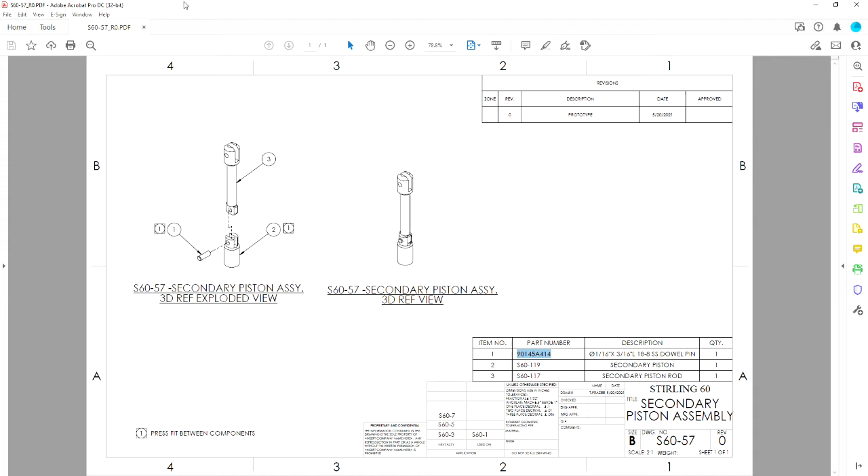We're going to go to our browser, and you're going to go to www.mcmaster.com. If you're working virtually, you want to do it through the browser on the virtual computer so you can download it straight there. Otherwise you have to download it to your local computer and use the file transfer. Okay, so if we go back to our drawing, I'm going to highlight the part number from the PDF and use Control-C, go back to our browser, and Control-V to paste that part number in McMaster-Carr's search tool.

Now you could search through it as fasteners, dowel pins, and it's a great resource for engineering because they give you a lot of information here. And also if they carry it, you're pretty much assured it's a fairly common item. It's not going to be hard to source elsewhere. So this brings me right to the catalog page for those 18-8 stainless steel pins, and it highlights the product that we're going to use.

And if there's CAD data available, computer-aided design data, you're going to select product detail, and it might make you create an account. It doesn't cost anything to have an account, so go ahead and do that if you don't already. Well, let's try it again. I'm going to put in my product and go to product detail. On this page, it's going to give you all the specifications, typically a drawing, an image, and what standards it meets.

And it looks like now they actually have an add-in for SolidWorks 2017 or newer. I wasn't aware of that. That's not installed in the lab, so maybe next semester I'll get that installed. But you can basically download a model in any of the following formats. The 2D is going to be a drawing itself, and the 3D models are going to be actual models, so that's what you want.

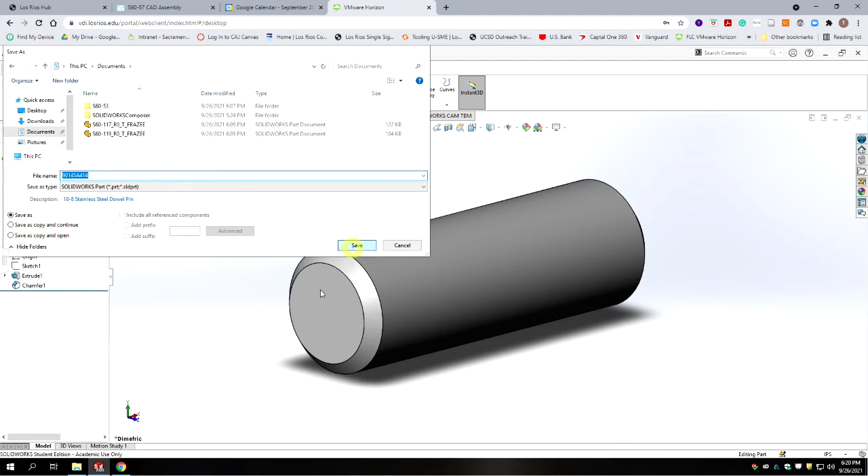Okay, we're going to hit save. And it's going to ask you, this is an older version of the file. Do you want to convert to the current version? Yes. So we're converting it from, I think, SolidWorks 2014 to the current version. Okay, hit yes. All right. So we're going to close the part file, and we can go back to our File Explorer, and we should see our 3 files together.

Now in large assemblies, I will often make a folder that's just for hardware, and then those part numbers go in there so I know what's purchased versus what is modeled. And if I use this component in multiple assemblies, then I just have to download it the one time and just reuse it. But for this class, it's probably better you keep them all together because you're going to have to upload all 3 of these files, including the assembly file, which would be a 4th file, in Canvas, and I need the links to be independent of any other file structure you have. So we're going to leave it all at root here.

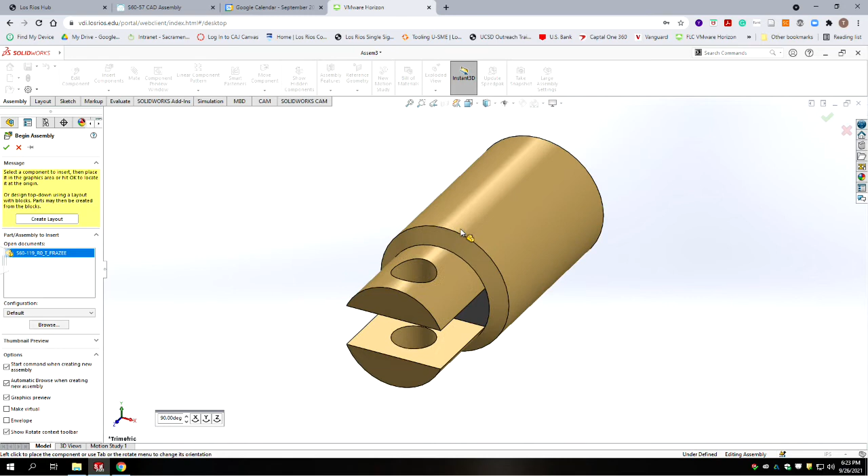Now we're going to go to SolidWorks. And we're going to go up here, we're going to say File, New, and we're going to create a new assembly. And it's going to ask us, what's the first part you want to bring in this assembly? It's the highest part number, which is the 119. So we'll select that. And remember, we want to temporarily turn on our origins.

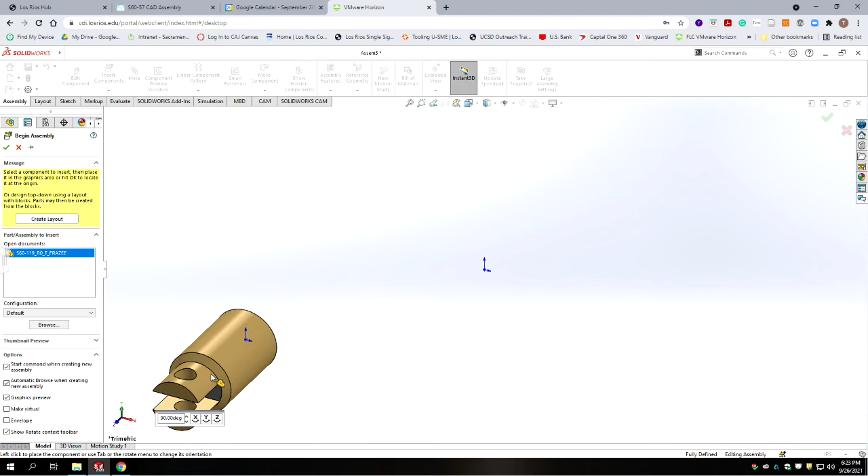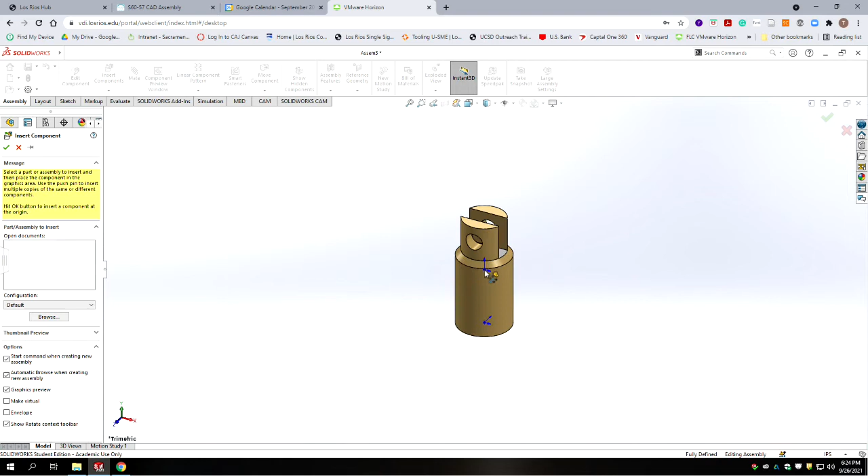And this actually is not in an orientation like I want for the assembly. So if you see down here, there's an angle by axis that you can spin. So I want to rotate this around the x-axis 90 degrees and then do it again and do it again. Okay, and then that looks more in the orientation it's going to be used on the machine. And then I'm going to hover over origin and select origin, and it's going to place it like so. We'll go ahead and hide those origins. We don't need them.

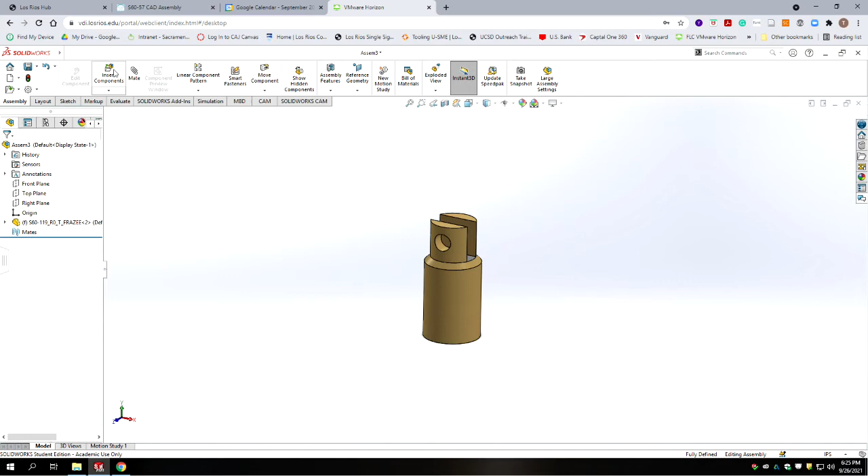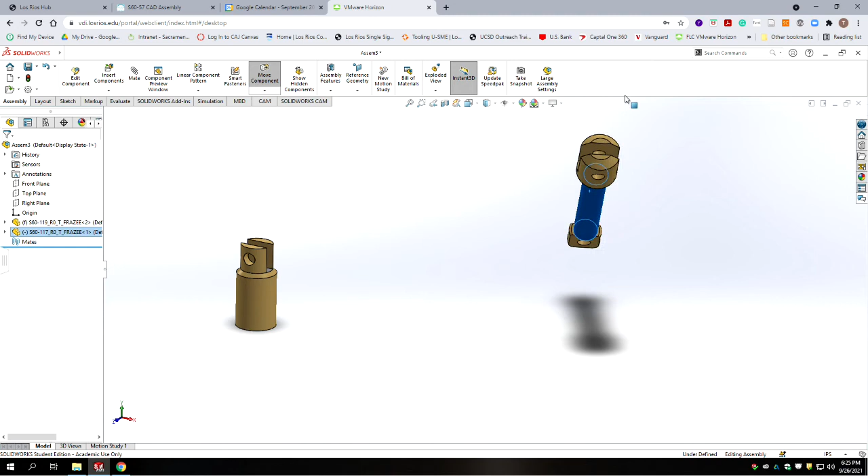And we have our piston part. Okay, it should be fixed in space. You shouldn't see a negative symbol over here, and the F in the bracket means it's the very first component. All right, so let's insert our next component, which we're going to select the 117. And we can just kind of place that in space. And if you click on it with the left button, you can move it around. And if you click on it with the right button, it allows you to rotate it into position. So it depends on which mouse button you use to do your selections with.

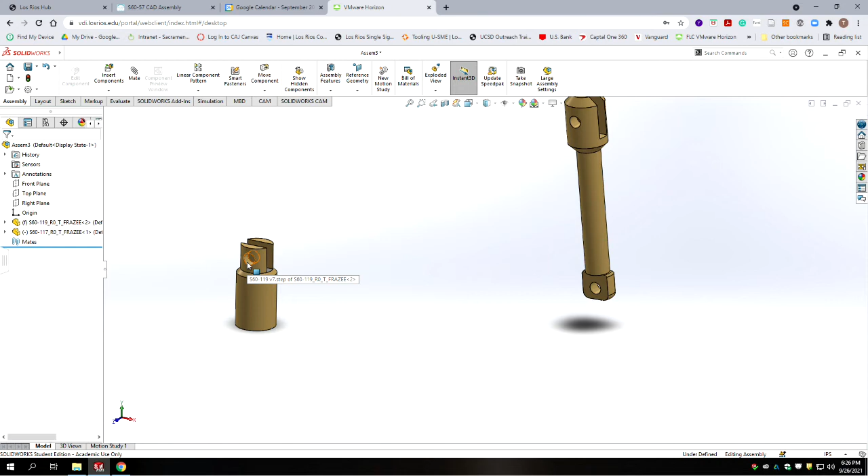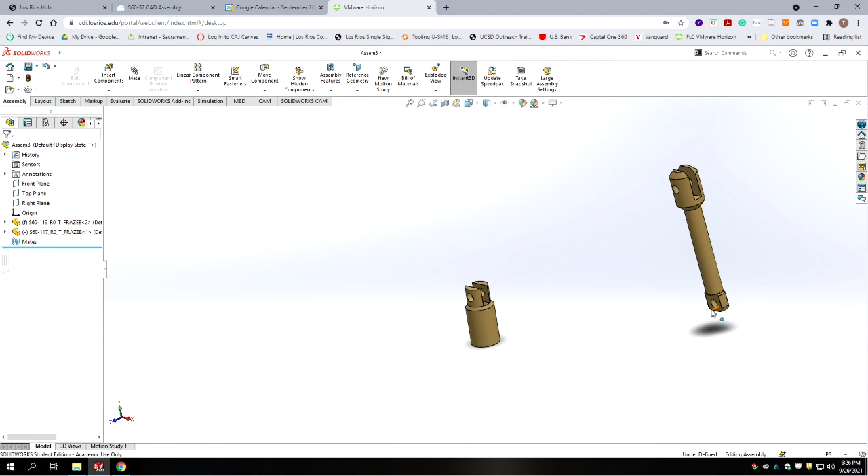Okay, so this part, in orientation to this part, would be that this pinhole is concentric with this pinhole. It also has this tab centered between these two tabs. So we're going to use a couple different commands to set up those relationships between the two parts. Okay, the first one is we're going to do the concentric, which we've done before. So we're going to go mate, and we'll select the inside cylinder, and then we select one of the two cylinders on the model.

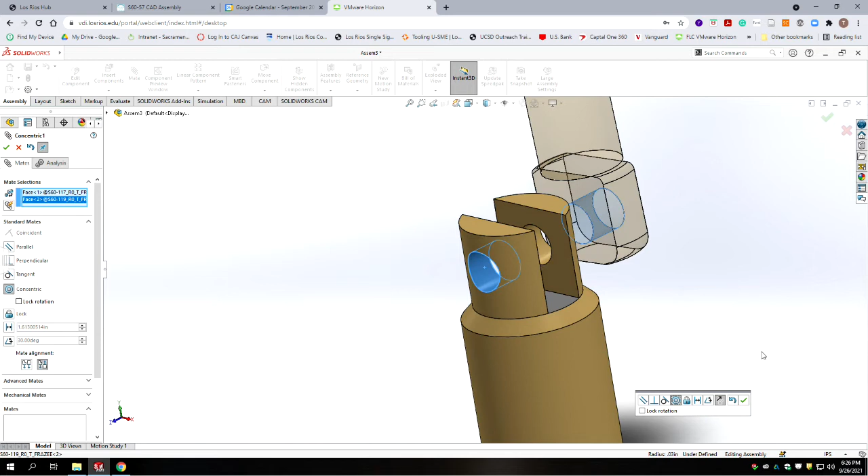Okay, and in this case I'm not going to lock rotation because this is designed to spin between those two parts. So I'm going to hit accept. So now we have it's concentric. You know, it can be anywhere along here as long as it's concentric, and it can pivot.

Okay, but what we want to do is constrain it so it's in between those pieces, and I think we should shoot for it being evenly spaced. So to do so, we're going to go down here and close the standard mates, and we're going to open the advanced mates, and we're going to use the mate by width command. So let's pick on the mate by width.

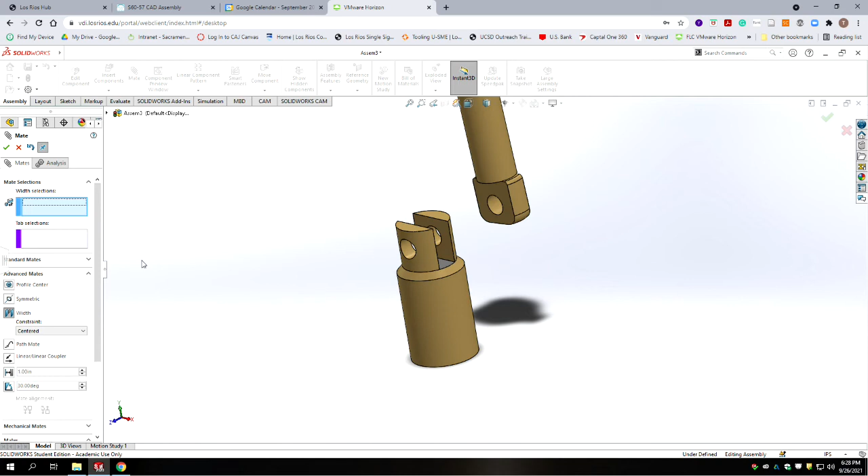Okay, and you get these two boxes. So you have your width selections and tab selections. Now, it doesn't really matter which component you select as width versus tab. It will still figure it out. But the intent is on the width section, I'm going to go on the inside of the slot and select the two faces that make up the slot. Okay, so there's my width that I want to mate this part with.

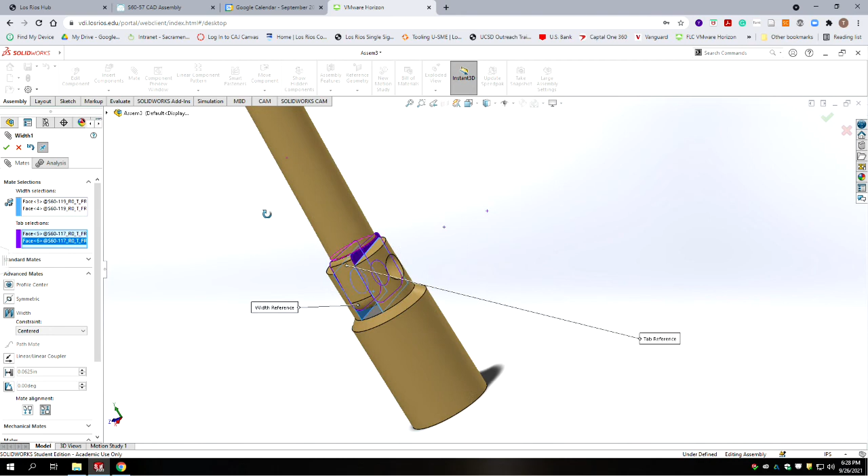And now what is the tab selection? I'm going to select the two sides of the tab itself. And so the purple surfaces are the purple surfaces I selected, and the blue are the blue. Okay, and once that is done, it should be centered equally. So if we have any tolerance, you should have a little tiny gap on either side.

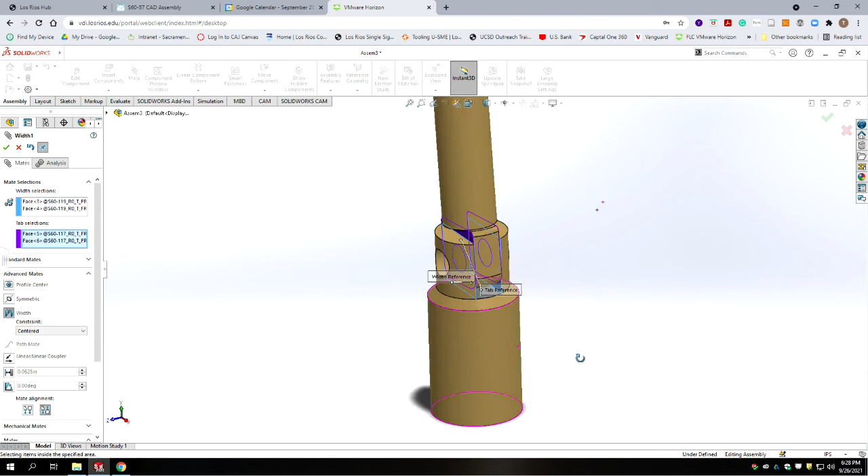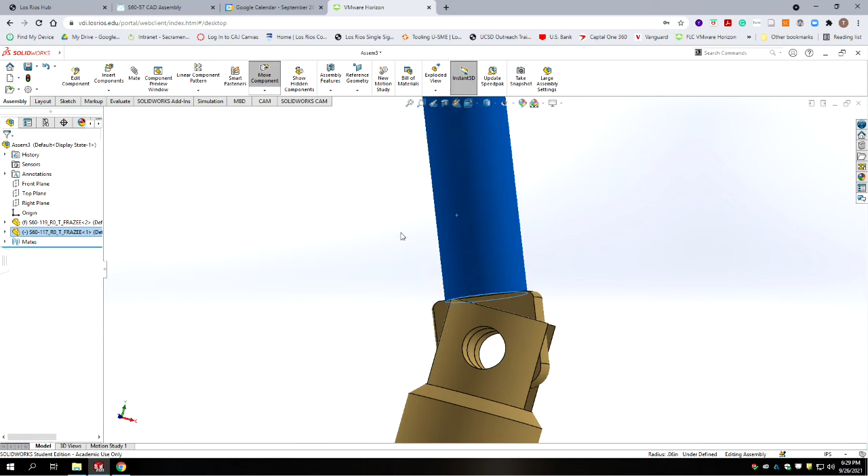Okay, we're going to accept that, and if I exit the mate command, I should be able to still manipulate this back and forth. It's concentric. There is no real collision detection, so technically it would start interfering about here. The range of this part doesn't go that far in the real assembly, but it'll still let you rotate it even though there's an interference there. There is a part interference analysis you can apply.

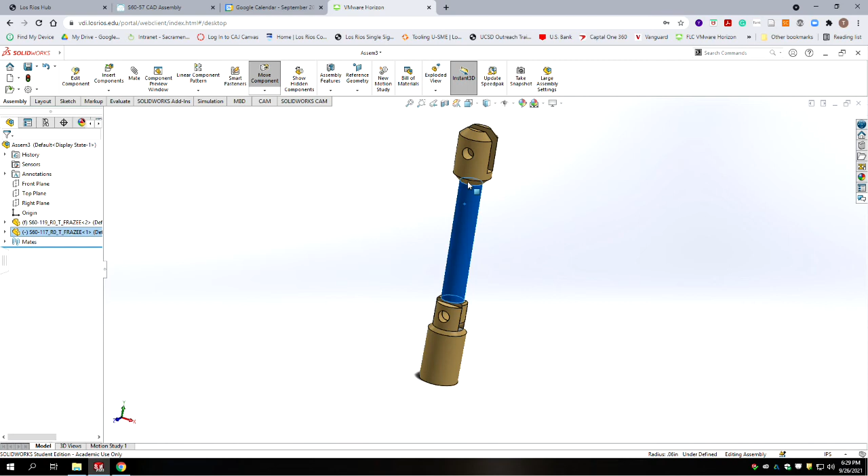Now, if we really wanted to fully constrain this and get the minus symbol to go away, we would need to constrain this at an angle. I'm just going to leave it. It's okay if it's visual. And if you are going to do animation, you wouldn't have this fully constrained in that axis.

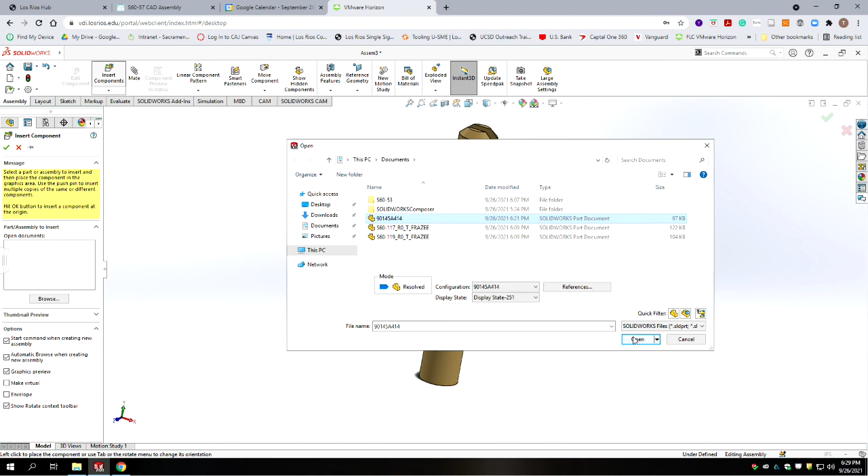All right, our last component is the pin. We've already downloaded it, so we're going to go insert component, and we're going to select our dowel pin from McMaster-Carr, and we're going to open it and just pick anywhere out in space, and then we're going to right click on it. I like to turn the components roughly in the orientation. It's better at predicting how the mates work if you do that.

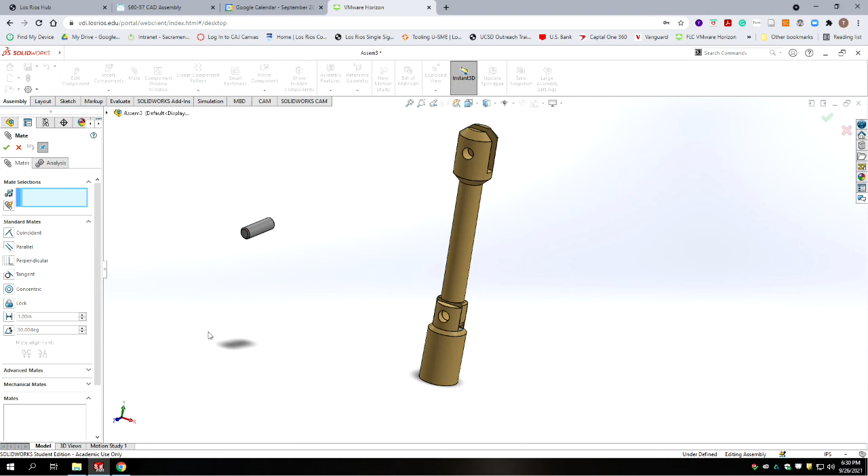Okay, and so this pin, you guessed it, this cylinder needs to be concentric with this cylinder. So we're going to go to Mate. You're going to select the cylinder of the pin. And then we're going to select the cylinder of the outside part. Okay. And so it's going to snap to be concentric.

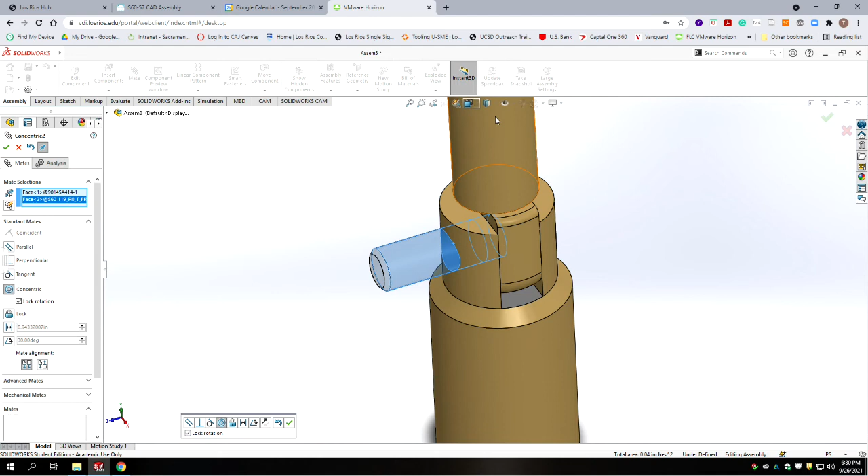Now the tolerancing on this drawing may not be coming through visually, but it's a press fit on the piston, and on the rod it's a slip fit. So by selecting it concentric to this outside and locking its rotation, it shouldn't mess with the joint. It should allow it to still spin. Okay, we're going to accept that. But now this pin can go anywhere as long as it's concentric.

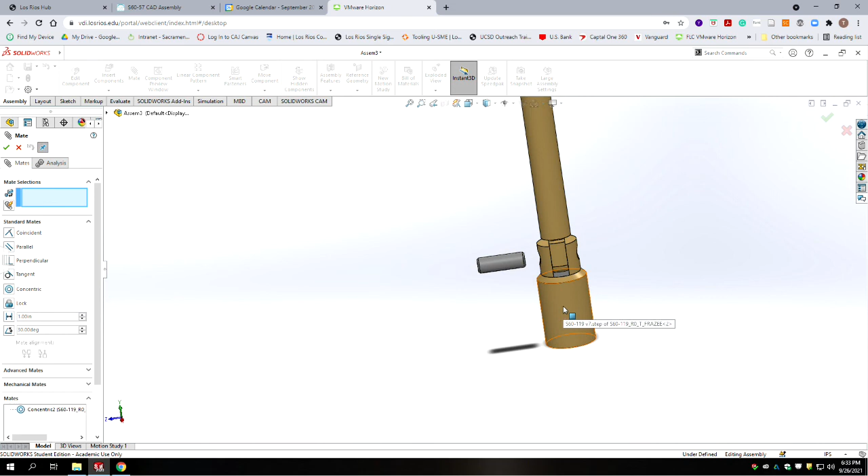All right, so this pin is wider than the flange it's going to go in, but it should be smaller than the diameter of the actual piston, and we don't want this pin to interfere. So what we're going to do is use another width relationship with this component. We want to equally space it as it's pressed in.

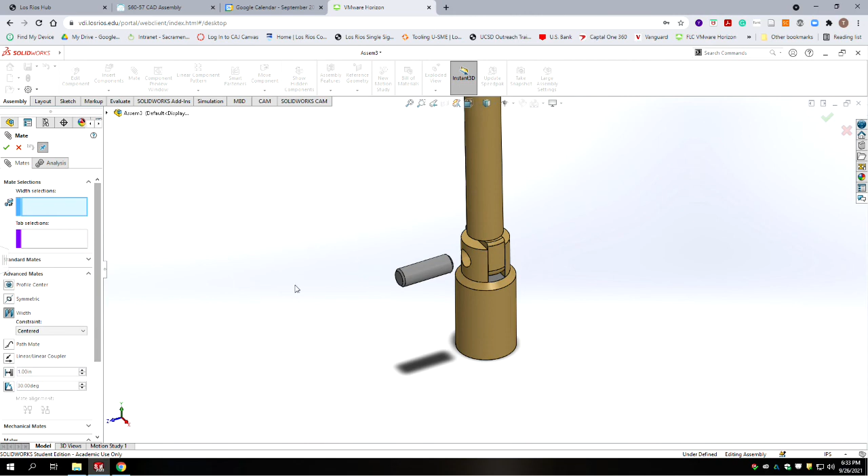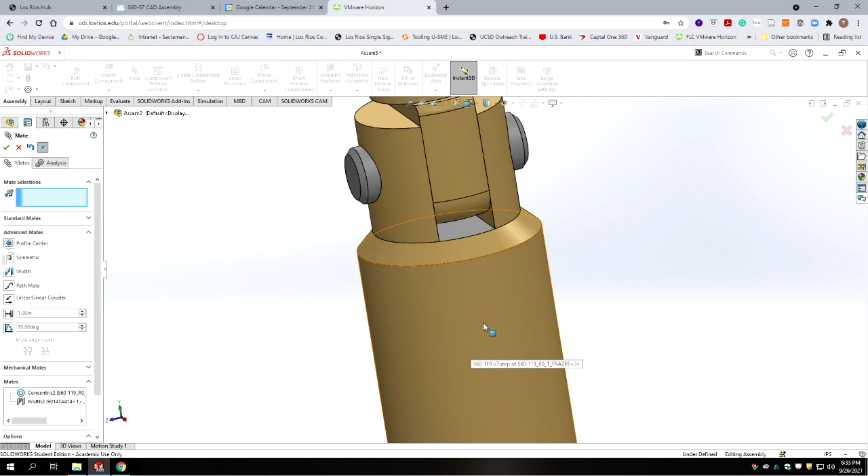So we're going to go down and use an advanced mate, and we're going to select width, and our width selection is going to be the two ends of the pin. And then we want it to center itself between the tab. And we hit accept. And what that does is the pin is equal distance sticking out, and we won't have any interference with the pin with the motion going in and out of the cylinder.

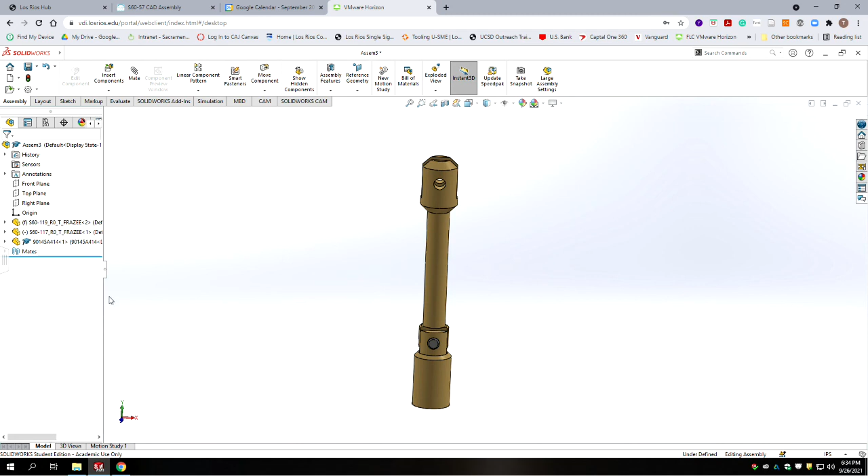Okay, that should be it for this assignment. Again, when you're all done, you should be able to tweak this back and forth. I would leave it close to vertical because when we take this sub-assembly and put it in a larger assembly, it has to process a lot for those kinds of movements. And that concludes this tutorial for the S80-57 assembly.